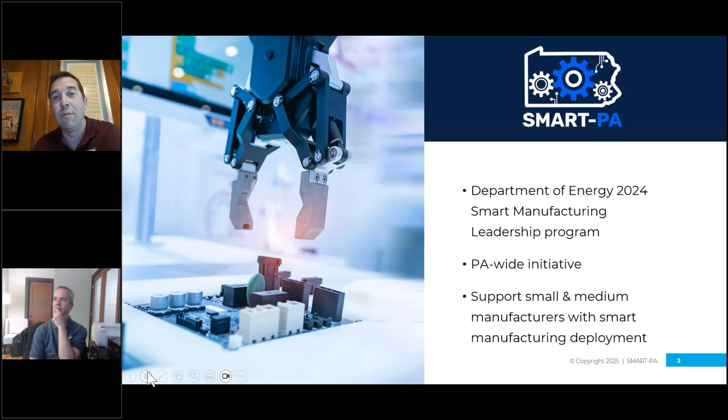This is brought to you by our Smart PA initiative, a Department of Energy focused initiative on deploying smart manufacturing with small and medium manufacturers across Pennsylvania. This isn't just a Catalyst effort, even though we're leading the program. It's available to manufacturers all across the state through our partner organizations. We have 7 centers across Pennsylvania able to administer all the resources for this program, including our partners at Digital Foundry in New Kensington, which focus specifically on support for technology deployment and training development. It's supported by the Department of Energy, the Pennsylvania Department of Community and Economic Development, and CESMII, the Clean Energy and Smart Manufacturing Innovation Institute.

We have a wide range of resources, generally starting from helping manufacturers like yourselves identify opportunities for deploying technology, where you're not just deploying technology for technology's sake, but looking at the challenges and opportunities you have to improve. That's a lot of what we're going to talk about today, how this kind of technology can do just that. We have free and low-cost technical assistance, along with mini grants available for $5,000 to offset the costs of your deployments, along with no-cost smart manufacturing training delivered by Digital Foundry all across the state, with a lot more to come.

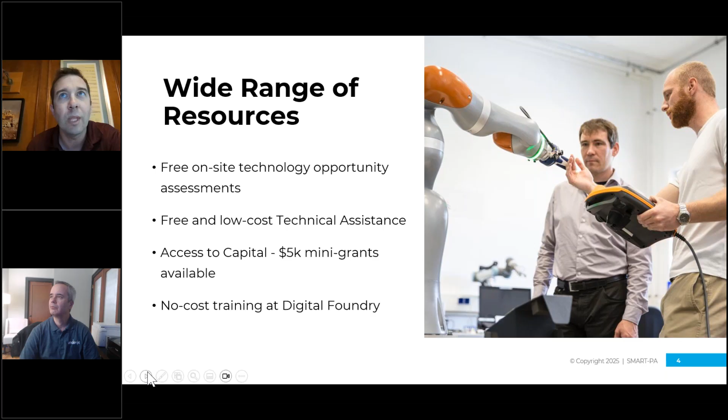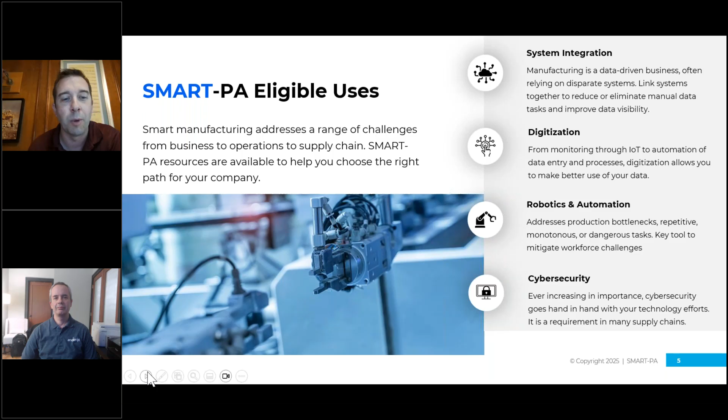And while we may be focused more on the smart manufacturing element in terms of data, digitization, etc., this really goes across all technology aspects when it comes to the Smart PA program. So really nothing's out of bounds. If you have anything you're exploring or interested in, definitely want to connect up with the Smart PA team to learn more.

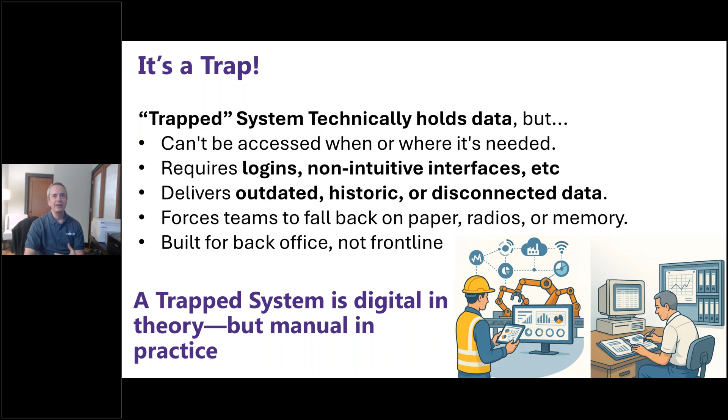So as I think about digitization capabilities, it's really getting into how that impacts and connects and allows people to take action on the shop floor. This includes operating types of things you're doing on the plant floor: safety checklists, quality review, first piece setup, tracking what people are doing in real time, all of this real-time operational intelligence.

Oftentimes that's all kind of glossed over, and people really miss the impact of what's happening right now. All of these systems, the ERP, the MES, they're great for standard, great for planning, and great for history, but in the moment, all of those things are really missed—not only in capturing it from the operators, but making it available to them as well. All of that stuff is stuck behind logins and non-intuitive interfaces, UI and UX that are a real pain to find what you're looking for.

Then I also think about digital alarm and escalation. I walked into a plant recently that had a stack light, and I'm like, cool, you got a stack light. What is that connected to? They're like, well, it's tied to the machine. I said, do you know anything about that? Does anybody else, other than somebody in physical proximity, know where that's at, how long it's been in the alarm state, and what causes there are? None of that is captured in those cases.

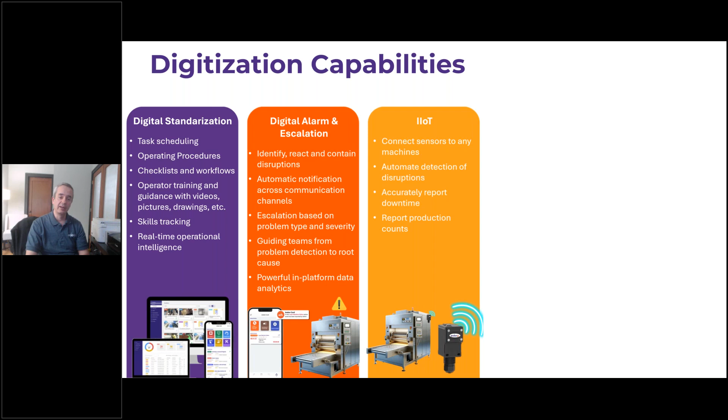These types of tools also allow us to record production and scrap, look at cycle times, uptime, and OEE. So IIoT really helps improve the granularity of that and releases your operators so they can focus on productive things, making parts instead of sitting in front of a PC.

What's been really cool is watching how AI agents have jumped into the picture recently to amplify the capabilities of workers on the shop floor—being able to ask questions you may not be comfortable asking your boss, or get a standard procedure, or have it created dynamically for you to use in your day-to-day things. It really helps people take action. A lot of the knowledge is either hidden in systems or hidden in people that may not be accessible to operators in real time. So having an AI agent supplement operators as things are happening has been super powerful, watching it really affect and impact the ecosystem.

There's a lot of talk about how AI is going to scour data lakes of 2 trillion pieces of information and sort through all that to see a relationship that may impact a machine going down in 3 years. We're always looking for those very tangible, impactful things that really allow an operator to do a much better job right now, right at this moment.

And then, of course, integrations. I don't want to be too dismissive when I talk about ERP and MES—they have a tremendous role as a system of record for capturing all that history, so we want to take advantage of that. We want to amplify the capabilities of those systems instead of putting them into the scrap pile.

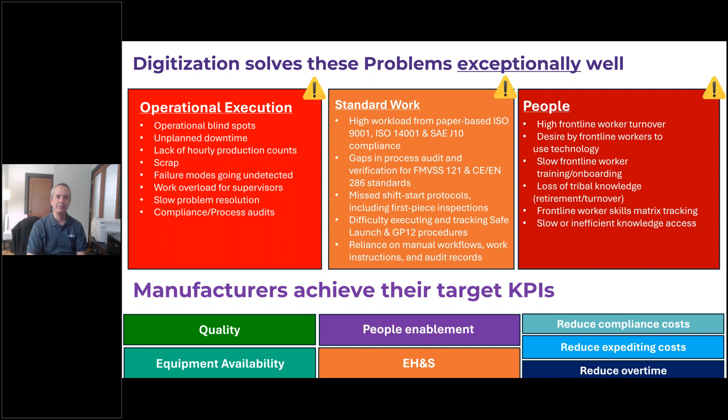So when we work with customers, we don't look at it from a project A, project B, project C, where we dedicate teams for 16 months. Instead, it's much more of an agile, consulting-type approach where we'll take a look at what are the pains, what are the problems, and they funnel into our matrix: is this a quick win that we can do with very low effort and very high impact?

Those are the easy wins that we can target right away. And then we can sort the others that are worth going after that are incremental. So maybe it's not quite the big impact, but it's still not much effort. So that might be a secondary thing.

And then we've got the big bets. This is going to make a huge impact, but it's also going to require a huge investment. Maybe the customer needs to put in a full OT system, they need to put in PLCs. So those are really great and hugely impactful, but we also know that those take longer. So we want to make sure we're future-proofing, but addressing the things you need right now.

I've talked a little bit about the gray work, and we've really just over the last quarter been focusing on the impact of that through research, seeing how much time people are spending just getting to do what they need to do, to enter information, to find that information. You take your typical maintenance worker - how much time are they turning a wrench? That might only be 25% of their day, whereas the rest of the time they're filling out paperwork, going into the CMMS system, trying to find the parts they need.

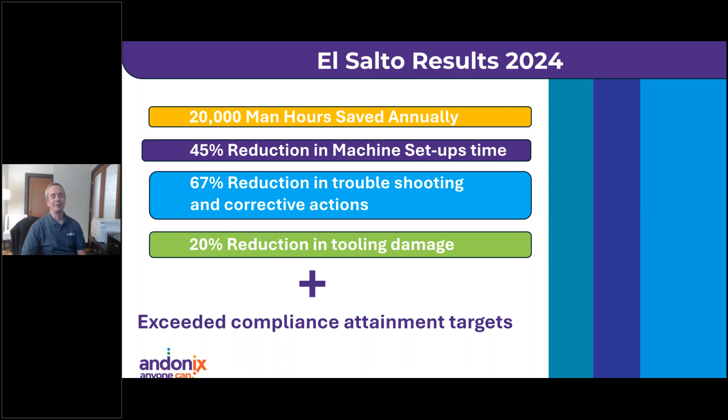With BorgWarner, just looking at the man hours that were saved, and the significant reduction in machine setup, reduction in tooling damage, troubleshooting and corrective actions - just so impactful. And this wasn't something that took twelve months to plan and scheme and draw up. This was something that was quickly deployed and used immediately.

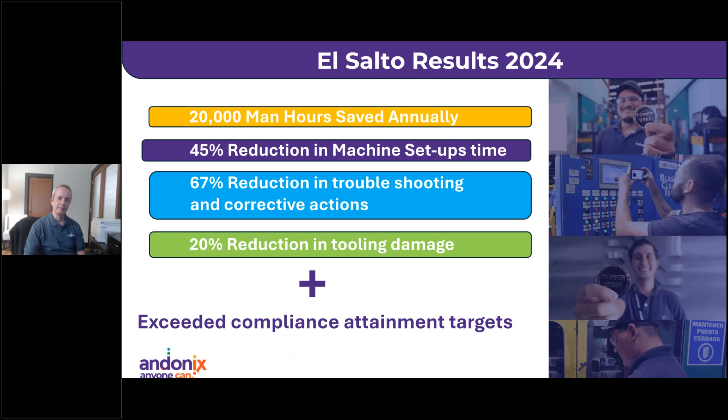So then as we look into some of these things that start off as maybe a small issue, but then escalate through the day, through time, through the different personas that have to deal with it - that's how this whole tool came about. Our CEO had ERP, had MES in his manufacturing plants, had all of the right tools of SCADA and HMI, but still at the end of the day there was some sort of panic.

And if he had seen that, if he had had access to that at the very beginning when it happened at hour zero, he would have been able to resolve it before it escalated into impacting the director of manufacturing. And then all of a sudden it's grown into a $500,000 problem, and the VP of finance is involved, and then the CEO is involved.

So we see this over and over, where something starts very small and snowballs into something cataclysmic. This was one of our cases with Sigma Foods - these guys are one of the world leaders in cheese and cold meat, some of your salamis and cheeses.

They had an issue where they were having machine downtime, and they didn't have any effective way to communicate to operators and maintenance to give them the tools they needed to help resolve that. There was also no knowledge from the shop floor, from the equipment, from operators to say 'here's what's happening right now.' And suddenly that snowballs into something so impactful that it ended up requiring them to hire more people, have an extra shift, have extra equipment.

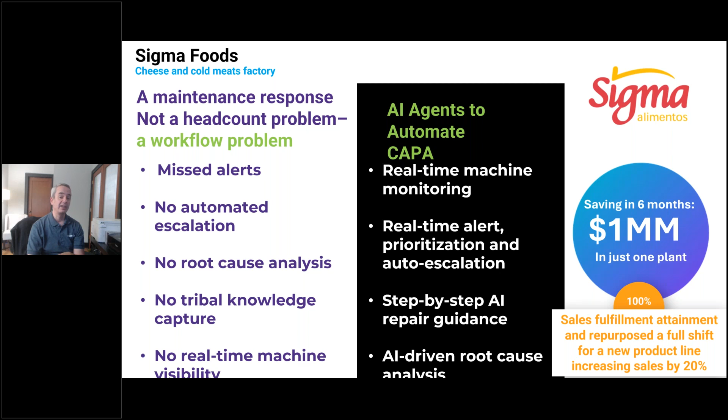So as we were able to help them, we completely reversed that - getting real-time information from machines, real-time alerts, providing their maintenance and operators with step-by-step methods they could use to repair it without engaging too far up the chain, and having that information not trapped in the system but available for them to really use those tools, that information, and complement that with AI to get great root cause analysis. It was great to watch them start hitting their fulfillment, increase their sales, and save a lot of money by making their equipment and their people much more effective.

Same thing with the first piece inspection. This was something one of our manufacturers was running into problems with, again, because the right thing to do wasn't the easiest thing to do. They didn't do it. So as first piece checks, they were running behind, it didn't become a priority. We got to make parts.

Well, that starts escalating into, all of a sudden, they didn't do the check, and their three lines are now starting to have this type of issue, and we got bad parts over this period of time. Oh my gosh, now we're so short of parts because of all the scrap. Now we got to add overtime, and all of a sudden that rolls all the way up to the CEO. Something that we could have caught 8 hours or 12 hours or 3 days before has escalated into something that's now on the CEO's desk.

So it was really cool watching to see something so quick and so impactful be embraced by the operators, and then watch the results impact all the way up into management, huge scrap reductions, great compliance on startups, and now it's being rolled throughout the plant to really make a huge impact.

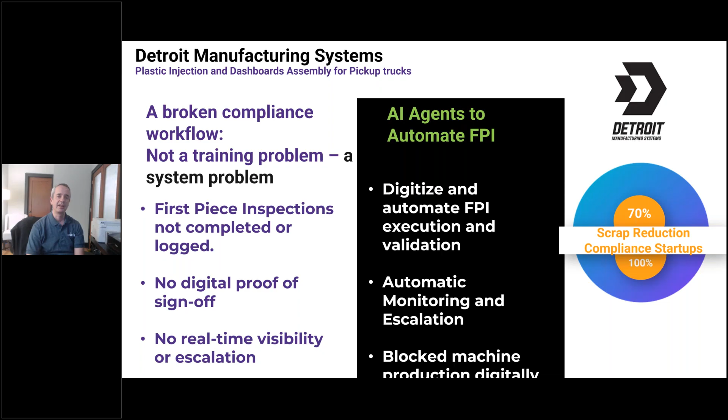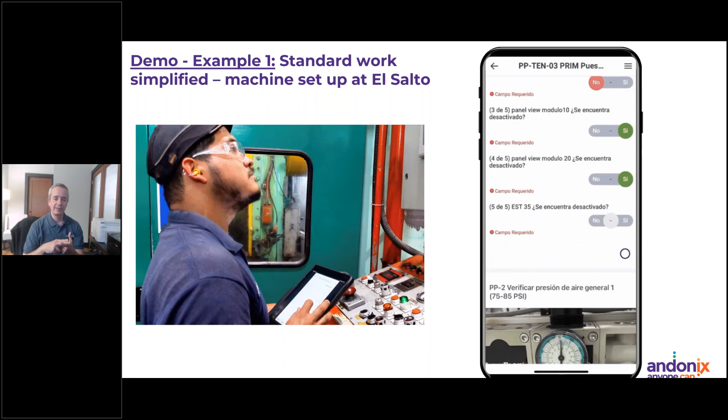So as I'm talking about this, how do we remove that friction, we're looking for that easy to use interface that our operators are comfortable with, almost like a social media type interface. It shouldn't be tons of logins and investigations and trying to find information. It should be available, it should be multimedia, so they can get the information they need and really be able to quickly go through checklists and take action.

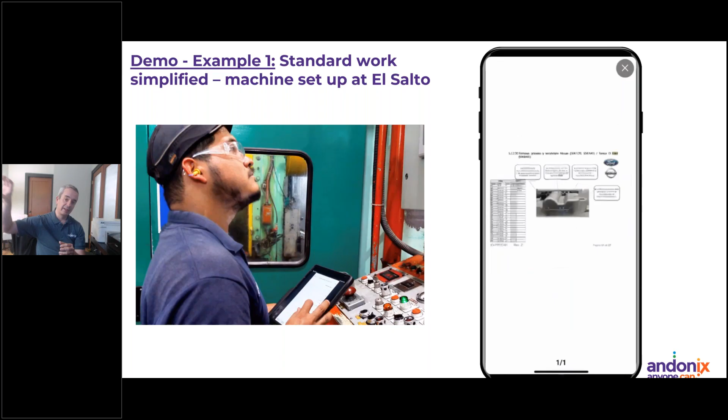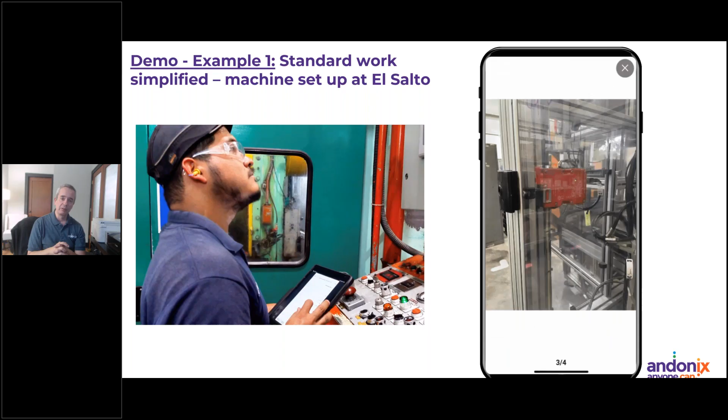So if that checklist doesn't have a good number, what does that do? Does that trigger an alarm event? Does that pull in the right people into the conversation to say, hey, that temperature is way out of whack for that piece of equipment, or that safety on that door really isn't doing what it should be? We need to get the right people engaged right now to take care of that before it snowballs into a big issue. And then what's really cool is watching how AI kind of jumps in now to really amplify the effectiveness of those operators.

So many of the things that are non-standard that happen all day, every day, really are never captured. All that tribal knowledge is missed. So we like to use AI to be able to complement and amplify those operators, to take that issue that you just had, and turn that into a standardized process so that the next time it happens at 2 o'clock in the morning, Bob, who was the only guy that knew how to do that, now we have a standard way to go through that and resolve that issue.

So AI has really allowed us to amplify that and automate a lot of those types of things, and then provide standard ways to address that the next time it happens, and capture all the history and all the tribal knowledge so the next person is ready to go.

So again, watching some of the success stories of how it's impacting quality and downtime. Even if you are digitally mature and have all of these systems, ERP, MES, SCADA systems, making sure that is available and contextual to allow somebody to take action on that. That's really the key, I think, to good digitization, making sure you're able to have the context you need to make decisions. And watching the impact of that has been so cool to watch the downtime and everything.